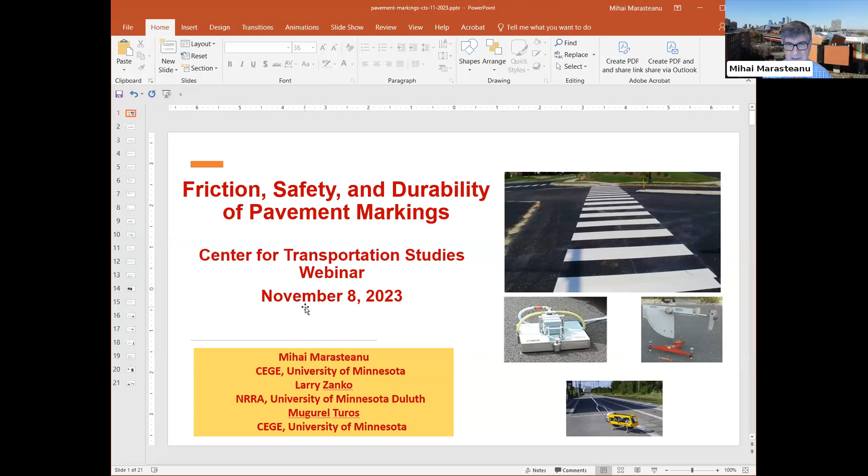I would like to start by acknowledging the research team. I am the PI and had the pleasure to work with Larry Zanko from NRRA Duluth. Actually, he just retired. And our research scientist, Mugurel Turos, on this project.

As Beth mentioned, the frictional characteristic of pavement surfaces is a major safety component, and pavement markings are necessary because they play an important role in traffic flow and safety, not related to skid resistance. However, due to the requirement of improved retroreflectivity for night visibility, they tend to be slippery because of the glass beads they generally contain.

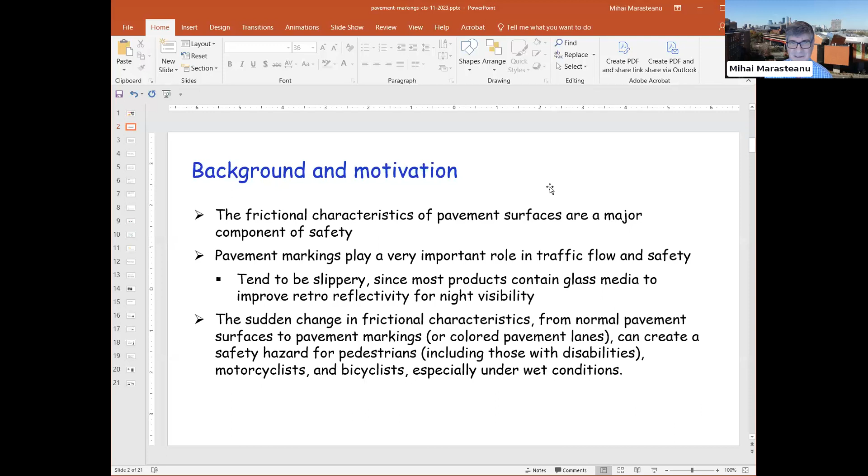And of course, the sudden change from a normal pavement surface to pavement markings without warning, which can also happen with colored pavement lanes, can create a safety hazard for pedestrians, bicyclists, and particularly motorcyclists, especially under wet conditions. I think we all agree with this statement. This research was championed by Ethan and his colleague Sonia. We started it a few years ago and are still working on it.

The main goal is to understand what's happening to address the gap in the transition from a normal pavement surface to a special surface condition, and also provide some solutions. As we always do, we look at what other people did, learn from it, avoid repeating prior work, and generate new ideas from the literature review. We performed an extensive review, both national and international, and I'll talk more about the international component later, since it provides useful information for implementation at the end of the project.

We also tried to find available data generated by others, and conducted a local survey to understand people's perceptions on this issue.

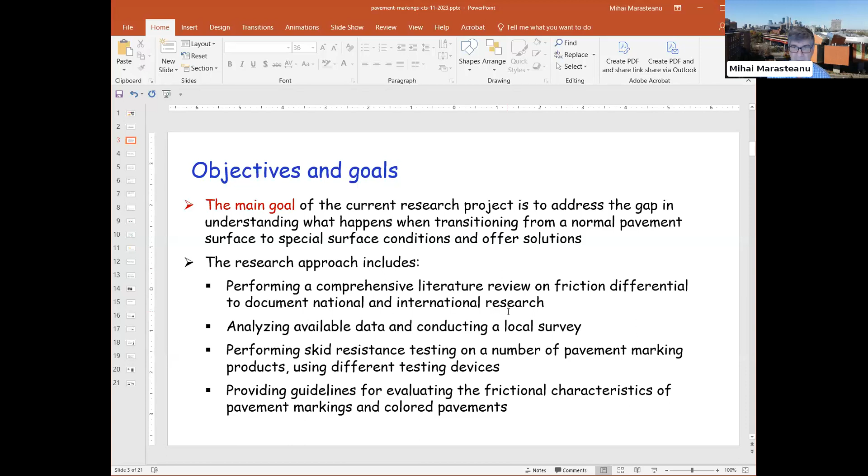Part of the research plan was to perform skid-resistance testing on a number of pavement marking products, traditional ones and some with improved skid resistance performance, using different testing devices. This is still in progress, and Ethan will discuss more about it; I'll just introduce it briefly. Our hope, based on all the results and findings, is to provide guidelines that could be used on a regular basis to evaluate frictional characteristics of these unique pavement surfaces, pavement markings, or colored pavements.

We performed a literature review and found a number of good resources. I don't have time to discuss all of them, but I'd like to highlight one particular reference from more than 40 years ago, from my own university, Penn State. The authors are J.J. Henry, Dave Anderson, and Gordon Hayhoe.

I had the pleasure of working with Professor J.J. Henry as part of their skid resistance surface characteristics group, and Professor Dave Anderson was my PhD advisor. He's also responsible for the PG specification for asphalt binders as part of SuperPave. But that's not why I selected them—this is a heck of a study, with a lot of experimental work in both laboratory and field conditions, and many valuable findings.

Of course, the materials used 40 years ago differ from what we use today, so we couldn't rely too heavily on the material characteristics, but the conclusions are still very valid. To give you an idea of the study, they tested 39 formulations of 11 different types of marking materials, in both laboratory and field conditions.

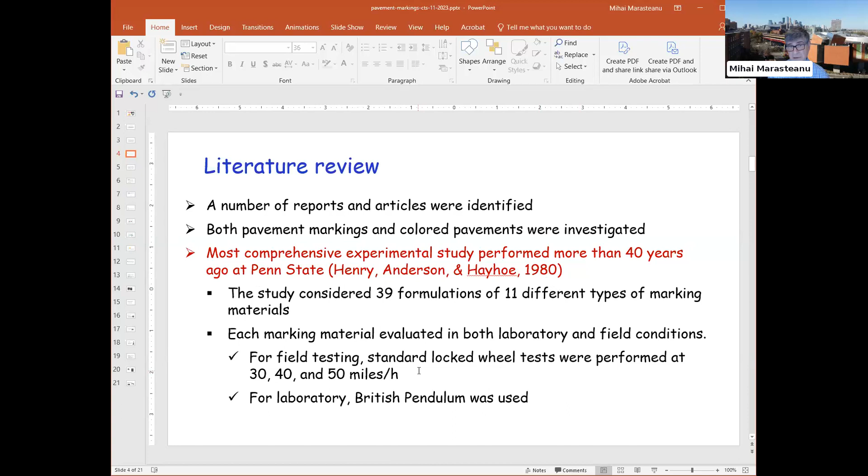At that time they used the standard locked wheel test, which was actually developed at Penn State, and in the lab they used a number of devices including the British pendulum test, which we also use. What they found, and which I think is still valid for current materials, is that none of the pavement marking materials approached the friction of the unmarked control surface, even after 9 months of exposure—so they remained with low skid resistance for an extended period.

Some markings were so low in skid resistance that the authors thought, if applied over large areas, they would clearly be a safety hazard. They also tried to establish allowable levels of marking material skid resistance, one likely goal of research in this area. However, they couldn't do so because they lacked enough experimental data, and because this involves analyzing the complex and variable nature of human behavior. So even with all these materials tested, they couldn't recommend a specific number, and suggested further studies were needed on driver behavior and accident data from marked roads.

They also concluded something most of us would likely agree with: that motorcyclists are more affected by this friction differential than drivers of four-wheel vehicles.

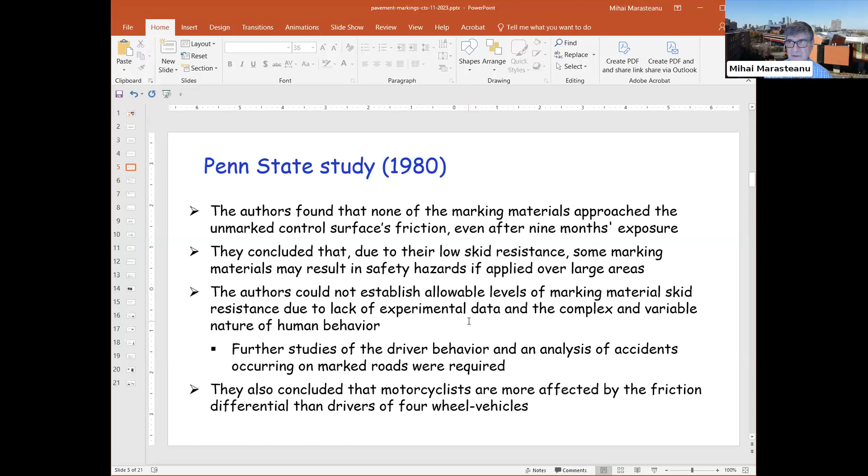And some of their conclusions and findings are reflected also in what we see later on in more recent research. What I have to say is interesting, but we still have this issue: we don't have a lot of data relating accident occurrence with pavement marking. So the data is very limited, as you will find out.

So we tried to do that after 40 years from this project, and the only historical crash data we found was from the Federal Highway Administration. However, this database has just a limited number of records, very few involving accidents, and it was mostly related to motorcycles. We did an analysis, downloading the data from FHWA and doing some statistical analysis, but because of limitations of the data, we couldn't find significant factors to clearly show what is influencing, in this case, the number of fatalities.

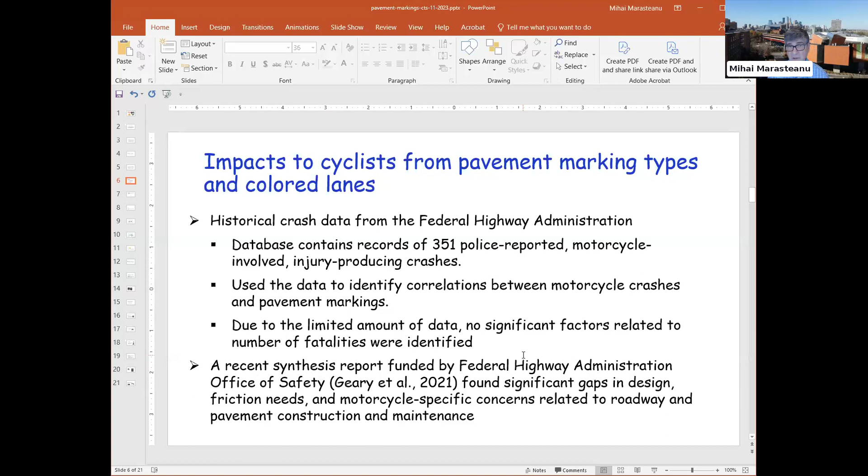We also looked at a more recent synthesis report, also done by the Federal Highway Administration, the Office of Safety. I communicated with Georgene Geary a few years ago, and they also found significant gaps in the design, friction needs, and motorcycle-specific concerns. In this report, they also provided a few recommendations.

Among them, one that we also followed without knowing about their report was using a dynamic friction tester and British pendulum tester for systematic testing of frictional characteristics, because they're easy to use. The locked wheel test device, obviously, requires very large strips of pavement markings and traffic control and so on.

They also suggested this innovative detail for pavement markings for crosswalks, designed to avoid the wheel path. As you can see here, here's the wheel path, and this is the crosswalk pavement markings. They show this as an example.

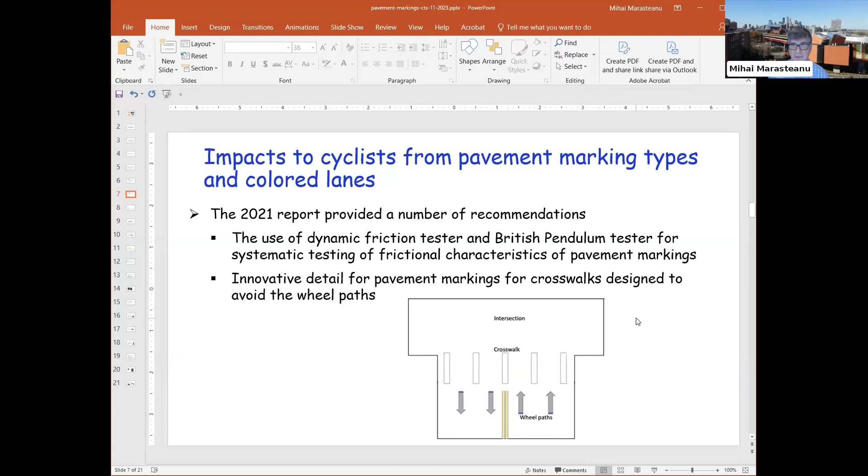All right, so next, what we've done was let's find out what users—bicyclists, pedestrians, motorcyclists—actually think about this problem. And we performed a survey. It was focused more on the local community, but we were also able to get information from bicyclist and motorcyclist groups and various transportation and engineering organizations.

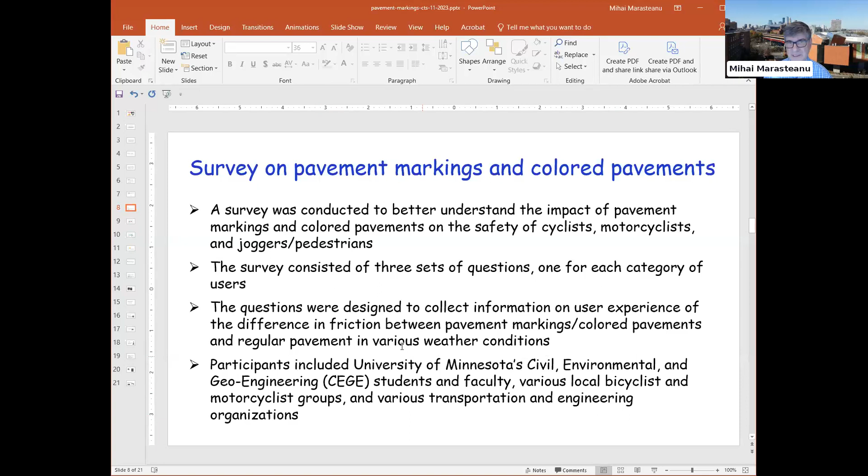We surveyed our department, our students, our faculty, our staff. I have to tell you that we have many of our staff, faculty, and a lot of students doing a lot of biking. I was quite surprised to see how active we were. Basically, we had three separate surveys, with different sets of questions for pedestrians, cyclists, and motorcyclists. I'm going to show you briefly some of the results here. We have it published as a task report in a lot more detail, but this is just a snapshot of what we found out from the survey.

So this is for biking. When biking on a surface with pavement markings, did you notice any changes in friction when transitioning from bare surface to pavement markings? The blue color is yes, even in dry pavement conditions. The orange one is just in wet conditions. The yellow is just in wet, icy conditions, or no. And you see that there are a number of yes responses here.

If you add both dry and wet—here it's just in wet conditions—most of them are under normal ride, not a big difference under accelerate, but you see a big difference in braking when you are just in wet conditions. And there are very few responses related to colored lanes, which is why you see this bar chart here.

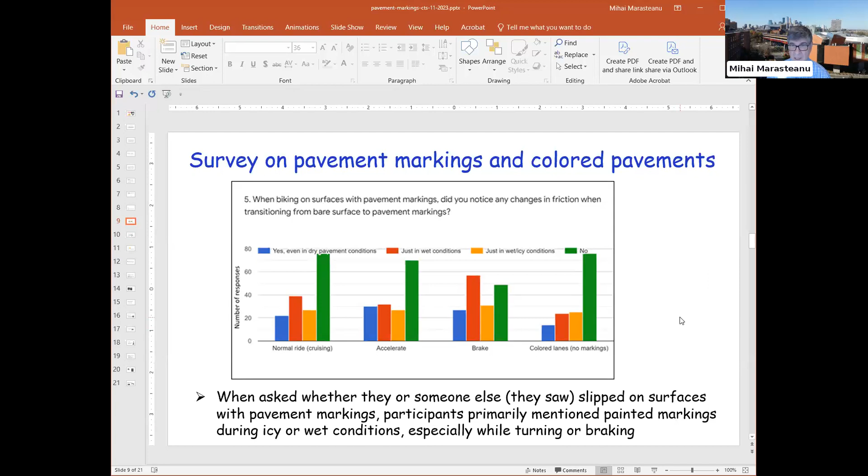When asked whether they or someone else slipped on surfaces with pavement markings, participants primarily mentioned painted markings during icy or wet conditions, especially while turning or braking. So that was something that many participants mentioned.

In terms of motorcycles, the same questions, and these are the answers. You see a lot more yes here, both in dry and in wet conditions. Most users mentioned that lane markings, markings at intersections, and crosswalk markings were the most prone to cause slipping, and again, smooth and painted markings were the ones responsible for most of these events.

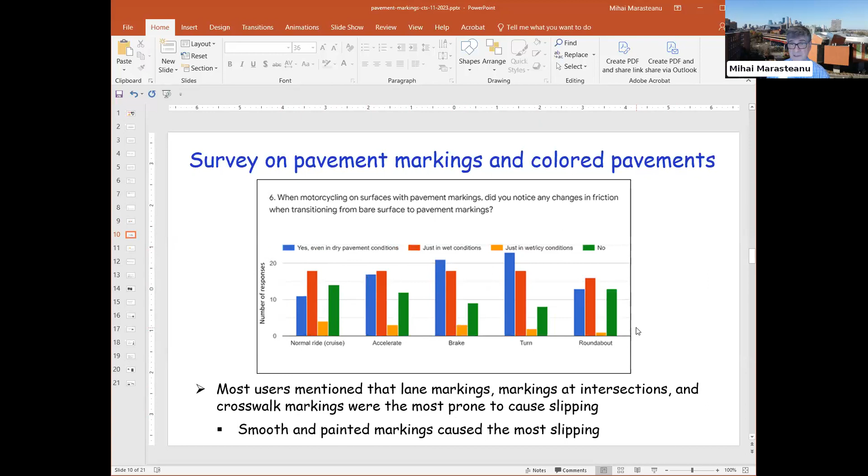In terms of joggers and people who walk, we have here a plot that shows on what kind of surface they walk or run. And you can see, of course, us Minnesotans, it doesn't matter—80% responded that on dry, wet, snow plowed, or ice covered, it doesn't matter, they keep doing it.

We also asked if they could comment on whether they, or someone else they saw, slipped on any pavement markings. Many users mentioned crosswalk markings—I am aware of a few cases among people I know—but they also mentioned that this happens on bare pavement surfaces while slippery in icy or wet conditions.

So in this case, they did not single out just the markings, it was the crosswalk. Maybe this is also due to the fact that people are rushing, trying to cross very quickly, and this is what happened. All right, so we found a number of interesting pieces of information about what's going on.

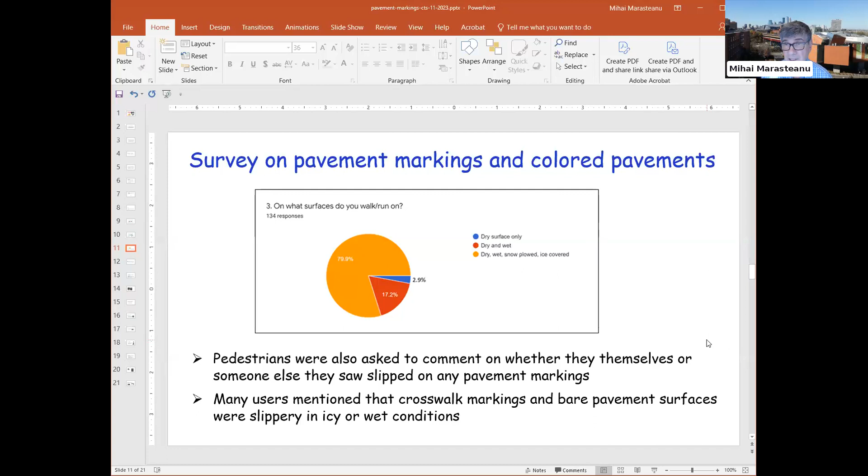While we were doing this and looking at what other people have done in terms of skid resistance of pavement markings, we found a very good resource later in the project, also through communications with colleagues from Scandinavian countries. I'm going to spend a little bit of time on this certification system used by Scandinavian countries, called NordicCert, because we found this to be the most comprehensive research and the most detailed process for certifying road marking materials. We thought we could get some very good ideas from what the Scandinavians are doing and hopefully apply some of that to our own certification system if we ever develop one.

This was developed for road marking materials and includes the countries of Denmark, Iceland, Norway, and Sweden. This started some time ago, more than 10 years ago. Based on conversations among researchers and engineers, they decided to establish test fields, and they all agreed on where to have these test fields. They established that in 2015, and they have new materials they've been testing every year since then, also measuring the properties. As of January 2023, the last information we got from them, they were able to test 560 materials from 25 manufacturers.

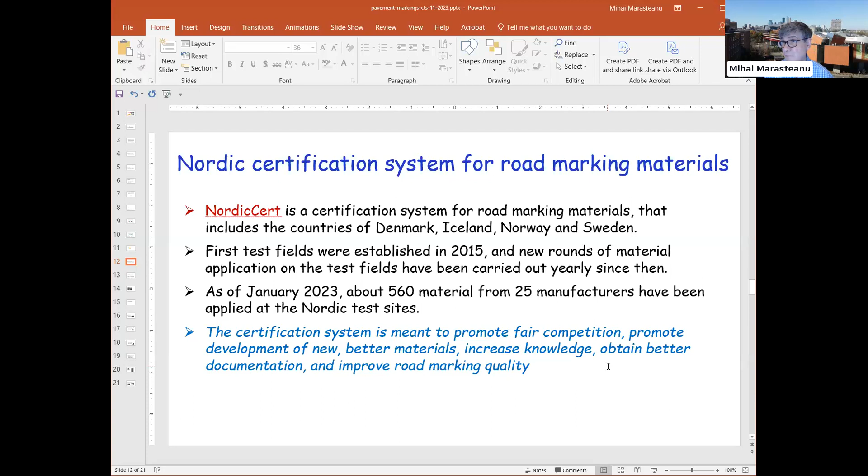So it's quite impressive. And I like this idea of this certification system. They developed it with the idea to promote fair competition, promote better development and new, better materials, increase knowledge, obtain better documentation, and improve road marking quality. This is not just for skid resistance—obviously they are looking at other properties also related to safety, retroreflectivity being one of the main ones.

So they proposed guidelines on materials for both longitudinal and transverse markings. Among the certification parameters, they included color, type 1 which they call flat, and type 2 which has properties that enhance retroreflection in wet conditions, inlaid markings, anti-skid materials, and so on. If you are interested, I encourage you to visit their website—there is a lot of very useful information, more than I can present here. But it's quite interesting to see how they started thinking about this a long time ago, and now they have a good system in place to look at these materials.

We also found a number of additional documents once we got to the NordicCert, published by the Swedish National Road and Transport Research Institute, the VTI, and the Danish Road Authority. Some of them, as I mentioned, we think can be used to develop something similar, maybe even better, for our conditions.

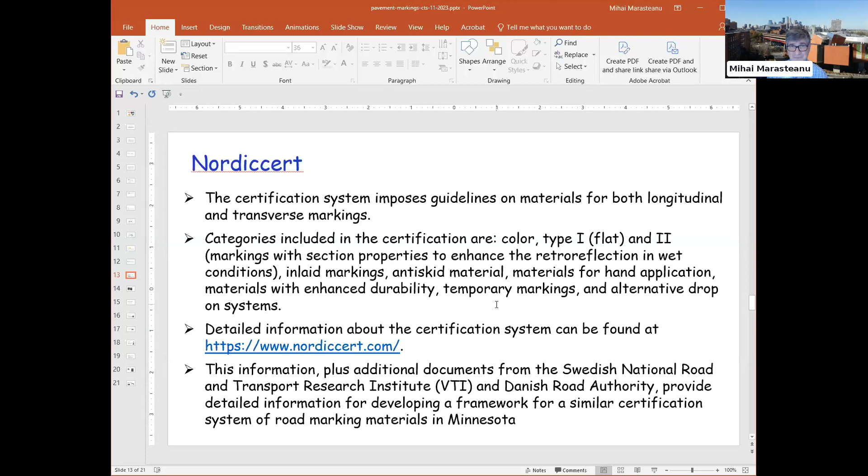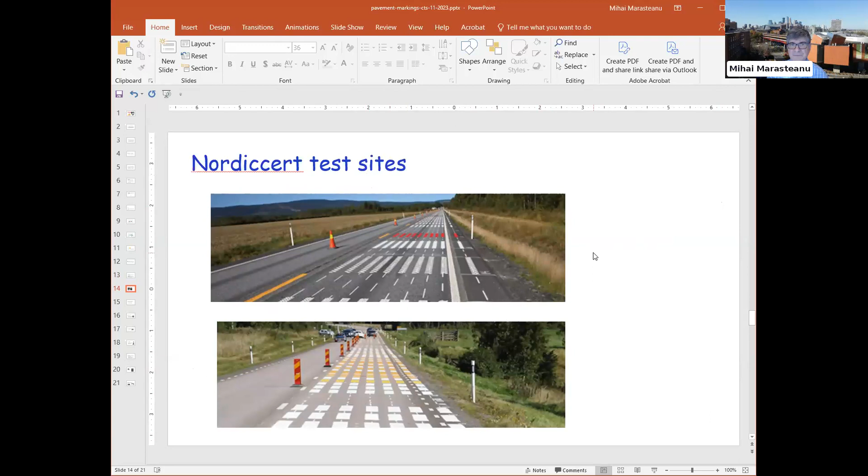These are pictures taken from their website that show the test sites. They are located in different countries here. So that's how they look—they look a little bit different than ours, as you can see.

Basically the way this works, they perform performance measurements. They apply the materials and carry out measurements two weeks after application, then keep monitoring them for durability after one year and after two years. All measurements are performed in the direction of traffic, and all measurements are done in dry weather and on dry markings, except friction, because friction is not too bad when it's dry but is really affected by the presence of water, so that's measured in wet conditions. There are a number of parameters measured, but mostly retroreflected luminance and luminance coefficient under diffuse illumination, and of course friction.

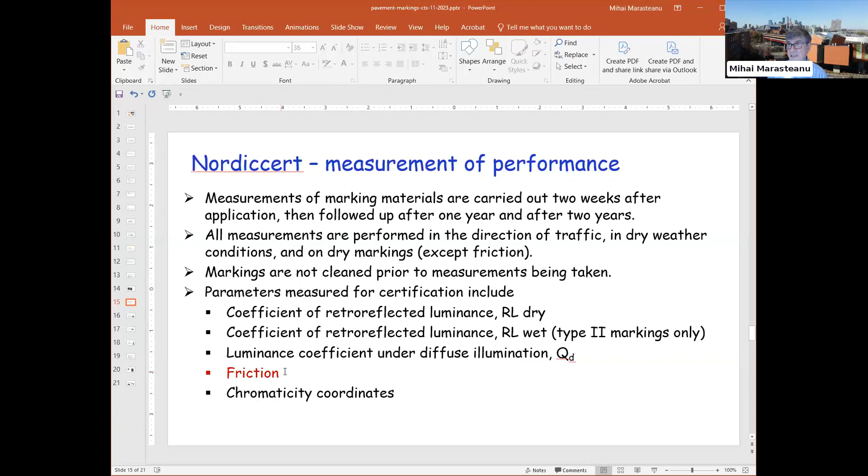When we did our literature review, we found a lot of research focused on retroreflectivity properties, but very little research done on friction of pavement markings. So this was one of the very few that incorporated this. They had a very clear way of measuring skid resistance—they measure it on wet markings like everybody else, but they developed their own portable friction tester, the PFT. This was developed by a Swedish company called Coralba, and it was the result of a lot of work performed at the Swedish National Road and Transport Research Institute over the years.

During that period of time, they found some very good correlations between the Coralba device and the British pendulum test that they used prior to the development of this particular testing device. We have been in contact with them and thought at some point to get such a device, but communication was not that great, and the device is quite expensive, so we did not include it in the budget of the project, but maybe later on we can revisit this issue.

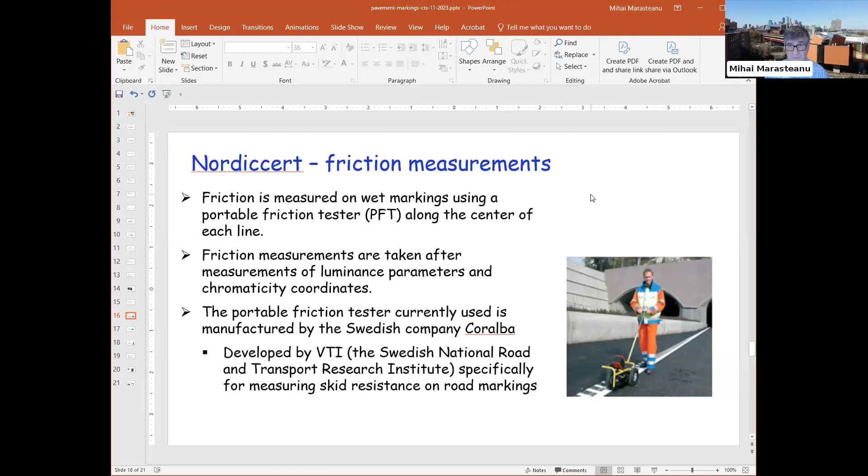We also found out there are a number of new developments that I thought would be worth including in the project, and maybe something that could be used in our situation. They developed a different type of road marking with a unique profile that combines the benefits and performance of flat and structured type markings. You can see it right here.

They have high wet night visibility because of this particular structure, but because they are flat at the surface, they provide low noise and vibrational levels. And because they are not flat at the pavement surface, they drain water from the pavement marking during rain. According to their ads for this product, the response time of motorists improved by up to 50%, so basically you improve your skid and braking ability quite a bit.

What I found also very interesting is this idea that in areas with very good nighttime lighting, such as downtown intersections, where you have ample lighting and it's not very dark, you don't really need these special retroreflective properties that actually diminish skid resistance. So maybe for these particular areas, pavement markings without retroreflection could provide a good solution, because they will also have good skid resistance.

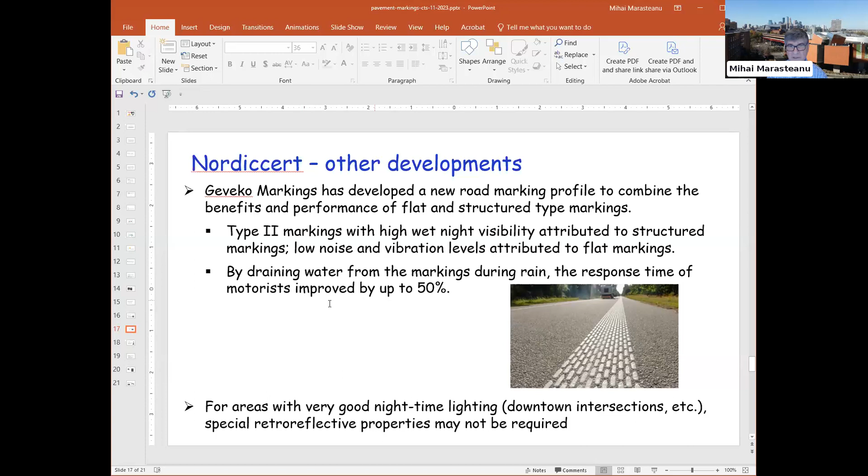So those were the things we found quite interesting and something to think about for future research. Once we finished getting all this information, we moved into the next phase of our project, the one where we hope to get the very meaningful information that will help us select the best products: performing friction testing on various pavement markings.

Our initial thought was to do testing with the British pendulum tester, maybe the most widely used, very portable. Of course, you just measure a tiny little bit of the surface of your pavement marking, but if you do this repeatedly, you can get good information. Since it's the way the rubber boot and the pavement surface interact, the speed is very low when you get this friction measurement, so it's more representative of skid resistance experienced by pedestrians and bicyclists.

Of course, our hopes were with a dynamic friction tester. This device has been proven to be excellent for determining friction properties. It was developed many years ago - I remember in the early 1990s meeting with the Japanese engineer who developed this product. He was trying to do some measurements at the Penn State research facility there. But now it's one of the most widely used devices, very simple, very portable, and can do measurements at different speeds, which is really important. So this was the other device we had in mind.

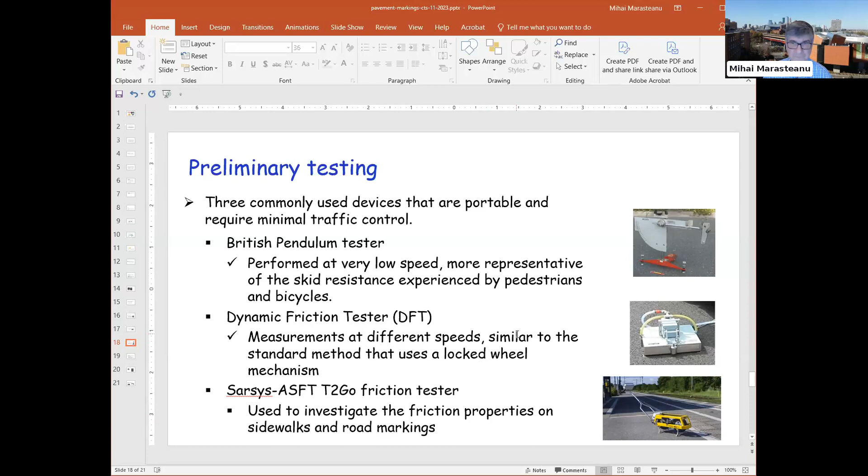We also thought of using the ASFT T2Go friction tester available at one of our laboratories at St. Anthony Falls. This was specifically designed for friction properties on sidewalks and road markings. We had big hopes for this device, but for various reasons, as I'll tell you, we were not able to use it.

So we did a lot of preliminary testing, some done on campus at the University of Minnesota, and we found very good correlation between the British pendulum and the DFT results. We found a very similar trend in testing performed for a different project near Duluth. My colleague Larry Zanko is the PI of that project, investigating the use of taconite aggregate as a lower cost alternative for high friction surface treatment to replace calcined bauxite, and we did a lot of friction testing there as well.

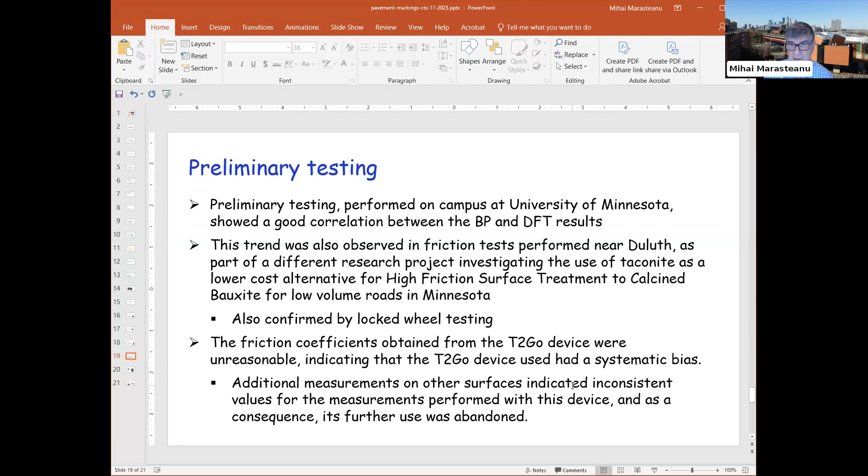We found that BP and DFT results correlated quite well, with additional confirmation from measurements done by locked wheel testing - they were able to do locked wheel testing measurements too. So we are very confident that British pendulum and DFT give reasonable, reliable results. We are not sure what happened with our T2Go device, but our results were not reasonable - very different than the other two devices - so we decided not to use it anymore. We ended up just using the British pendulum and DFT results.

These are some of the locations for our preliminary results, to make sure that the devices we are using give, as I said, reasonable results.

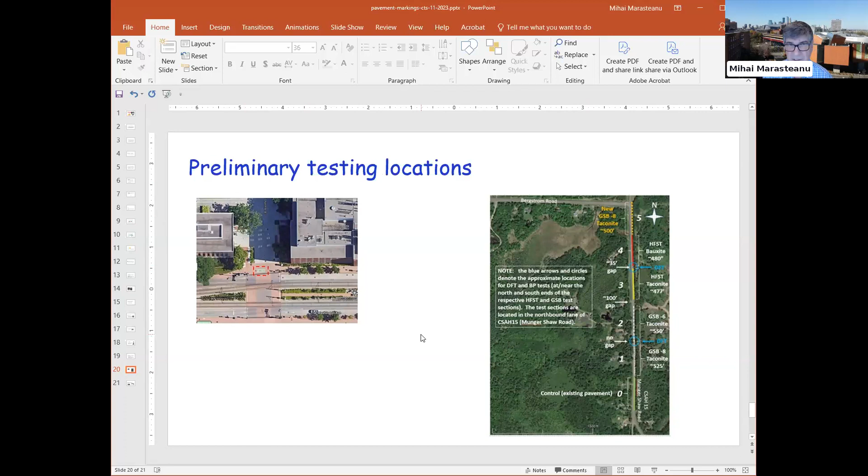So this is a location on campus. This is the location in Duluth, near Duluth, actually.

Based on everything we've done so far, we decided to move ahead with our testing campaign and perform friction testing on a number of pavement marking products. Since traffic control is such a big problem, we contacted our colleagues at the MnROAD facility to apply the pavement marking products there, test them, and keep monitoring them. This approach has significant advantages: minimal traffic control, different pavement surfaces available, and the possibility of long-term evaluation for skid resistance and durability, and possibly retroreflectivity measurements as well.

I'm showing you a picture here of the low volume road at MnROAD and some of their test sections, and we were able to do that. Ethan was instrumental, with tremendous help from our colleagues at MnROAD facility - Ben, Jacob, and Jeff were of great help. I'll stop here and let Ethan, who was responsible for all this work done at MnROAD, tell you about what was done there. So thank you.

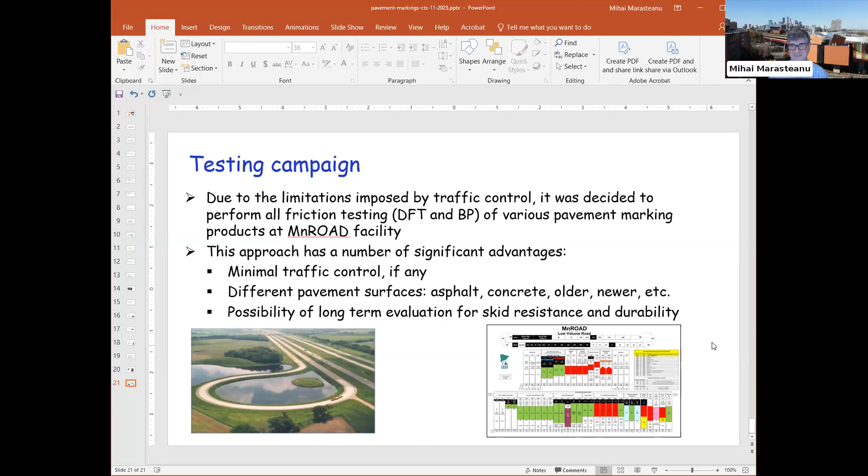Thanks a lot, Mihai. I'll take over here. Okay, I think we're up and running. Somebody wants to - it looks like Mihai's nodding. I'll take that as it's good to go. It is. Okay, perfect. Thanks, Mihai.

I'm Ethan Peterson, pavement marking and crashworthy engineer here at MnDOT Office of Traffic Engineering. I'm going to go over the background, why this came to be, and then go over a lot of the material installations as we mimic what we've been using and what we're looking at using in the future - some stuff we've demoed, different techniques. We were lucky enough to get a contractor on board to install a number of things, with a couple different manufacturers, and get out on MnROAD's low volume road here. We'll jump right in.

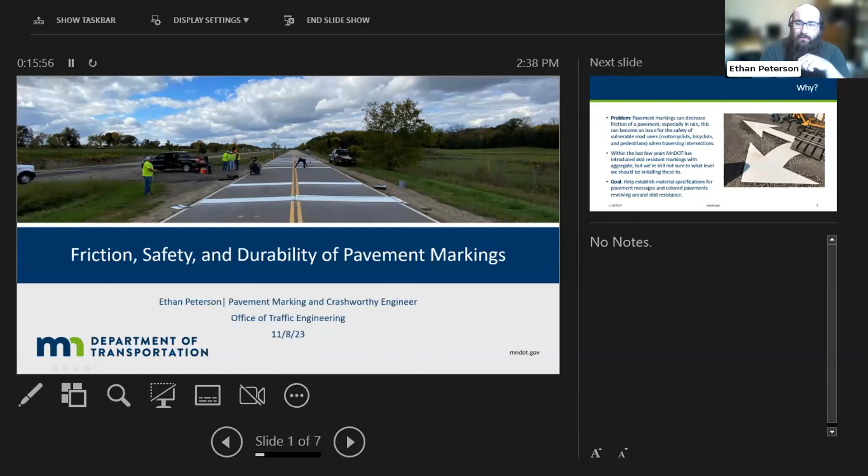So why, right? Why is always kind of where we start. Mihai went over this already, but I'll briefly run through it as well. The problem really is that pavement markings can decrease friction of a pavement, especially in rain.

I think we've all seen this. We've all been pedestrians, for sure. We've all probably biked through this stuff, and it really becomes a safety issue for what we're calling vulnerable road users - motorcyclists, bicyclists, and pedestrians - when they're traversing these intersections with pavement markings or colored pavements.

Some background: within the last few years, MnDOT has introduced some skid resistant markings, mainly with an aggregate. A lot of it has been a preformed thermoplastic product for the most part. We'll go over the materials - we have a flow chart next - but the goal of this really is to help establish our material specifications for pavement messages and colored pavements revolving around skid resistance.

We really would love for these pavement markings and colored pavements to match the friction of the pavement they're on. I don't know how many are familiar, but apparently F1 racetracks put a lot of effort into making all those pavement markings match the surface for all the same reasons we're looking to.

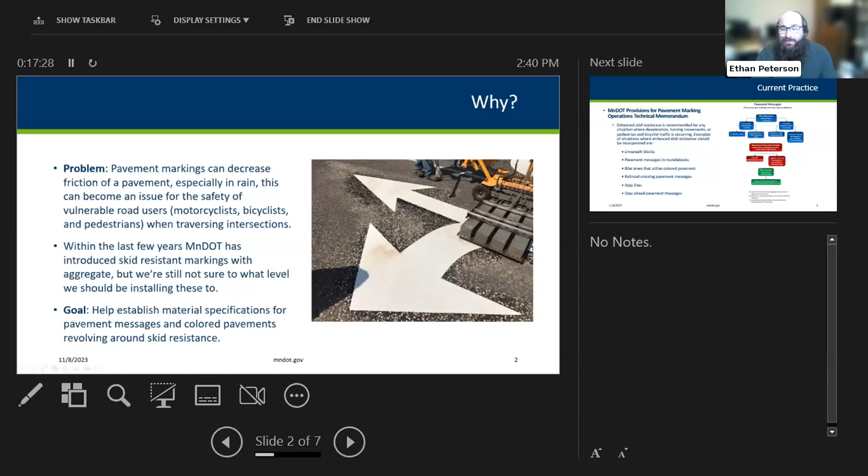The current practice for MnDOT has been established through our provisions for pavement marking operations technical memorandum. I'll highlight the section that talks about skid resistance - this isn't exactly it, but it's a section of it. Enhanced skid resistance is recommended for any situation where deceleration, turning movements, or pedestrian and bicyclist traffic is occurring.

Examples of this would be crosswalk blocks, pavement messages, and roundabouts - roundabouts being a big one - bike lanes that utilize colored pavements, railroad crossings, stop lines, and stop ahead pavement messages. So that's where we're really pushing for getting these skid resistant pavement markings out there. I'll admit we're kind of in our infancy of this.

This project's going to be a great starting point. We're already calling something out, but we don't know what our specification should be. We have a number, and we really want to see if that's going to meet our needs. Here you can see the flow chart that's in that tech memo for pavement messages.

You look at bituminous, you can kind of just follow along. We've got an expected longevity for each of these markings, and then we just call out each of these pavement markings. I won't go through them all, but feel free to Google this, and you'll find it pretty quickly.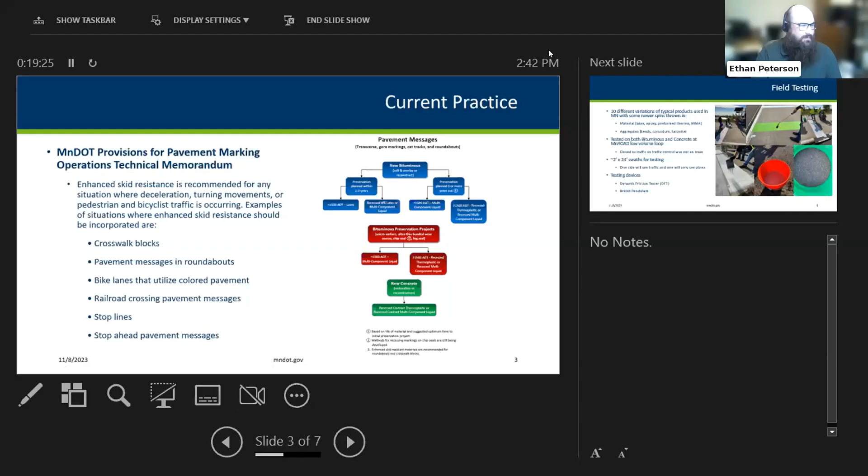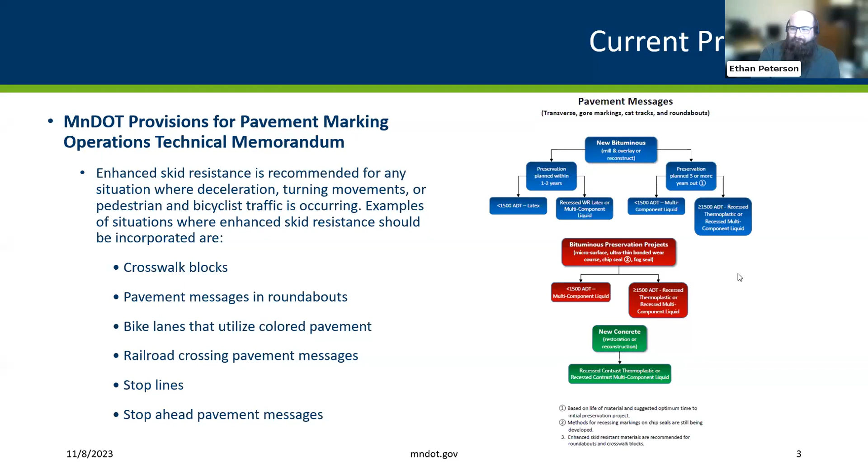Ethan, there was a comment that you are not in presentation mode. Could you switch, because we see both your next slide? Oh, I must be... I know your Zoom is not. I apologize about that, I might have shared the wrong screen. That's my bad. Tell me if this is correct now. Yeah, I've got Ethan. What's that? That looks good. Yeah, there. Okay, I thought I had it. Apologize for you guys seeing not as clean of a presentation here. We'll pick up here, and I apologize if you hear my dog, somebody just showed up at my house, I think. A delivery, I'm sure. Perfect timing.

Anyways, let's jump to the field testing here. We looked at 10 different variations of mainly typical products, but also some things with newer spins on them. The things we altered were the materials. Typical stuff you see in Minnesota are latex, epoxy, preformed thermo, and we've started demoing a lot of MMA, or methyl methacrylate - it is not mixed martial arts, that would be interesting to apply to pavement. We also looked at the aggregates you can switch in. What we messed with were the beads - we looked at corundum and taconite.

As said before, these were tested on the low volume loop on MnROAD, and they were installed on both bituminous and concrete. Like Mihai said before, it was awesome to use MnROAD because there was no traffic control necessary - there's one truck that makes a round all day, and all we had to do was call him off, and there wasn't any traffic, so that was great. As you can see in the pictures, what we were putting down was a 2-foot by 24-foot swath. We avoided the center line and edge line markings as much as we could, just to preserve those. This low volume loop is actually going to see traffic only on one side, and the other side will see just plows. So as stated before, the testing devices are going to be the DFT and the British pendulum.

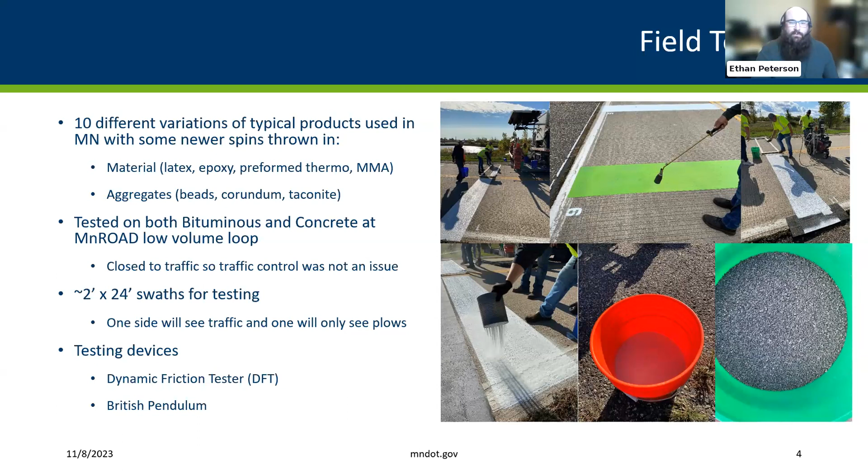So kind of some of the nitty gritty here - there's all 10 items here, and I can rattle these off really quick. The first thing we looked at was a latex with an AASHTO M247 type 1 latex, type 1 bead. Second one is the epoxy with the type 1 bead - those are pretty typical installations when not looking at skid resistance, and we wanted to make sure we get those in as a type of control. The third one is an epoxy with the type 1 bead and a corundum. We actually did some layering in some of these, and that one was layered - one layer with that skid resistant corundum, then on top a mix of beads and corundum. Number 4 is an epoxy with beads and taconite, same kind of layering approach.

That fifth one is an epoxy with a crushed glass product. From my understanding, it's a recycled glass that gets crushed to not exactly a super pointy characteristic, but it definitely is skid resistant - it has a pretty aggressive feel to it, some of these do. The sixth one is a bike lane type preformed thermoplastic, and that doesn't have any enhanced skid resistant items in there, just beads. And number 7 is preformed thermo with enhanced skid resistance, so that has beads and then also some, I believe, corundum in that one.

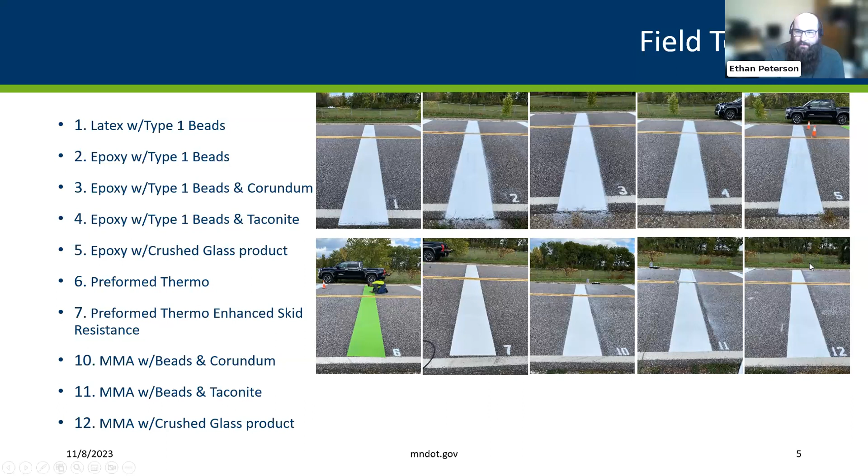Just for fun, it's always exciting to see things get installed. These don't have any volume—there was quite a bit of wind that day, and the machines are pretty loud, but I'll run through some of these installations.

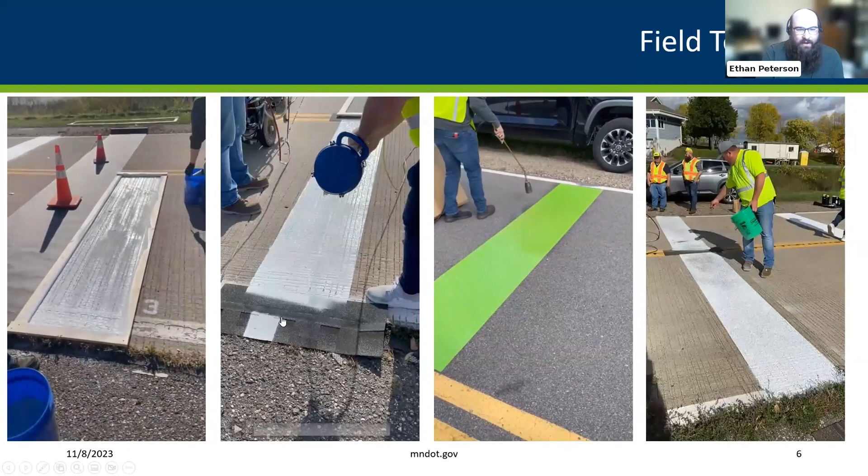Number 3 here is an epoxy with type 1 beads and corundum. What you're seeing get put down, sifted on, is the corundum through that little bucket. You'll see there are different methods to adding aggregates in this one.

The second one here is actually MMA, with beads and corundum. Right here you're seeing the corundum get spread through a pneumatic sprayer. This was pretty neat—it puts out a really even distribution compared to hand casting or the sifting technique.

Although the sifting technique, for how rudimentary it is, does pretty well.

This third one is a preformed thermoplastic. You can see I'm torching it on, and it's always kind of neat to see—this is the portion that hasn't been heated yet, and this one is heated.

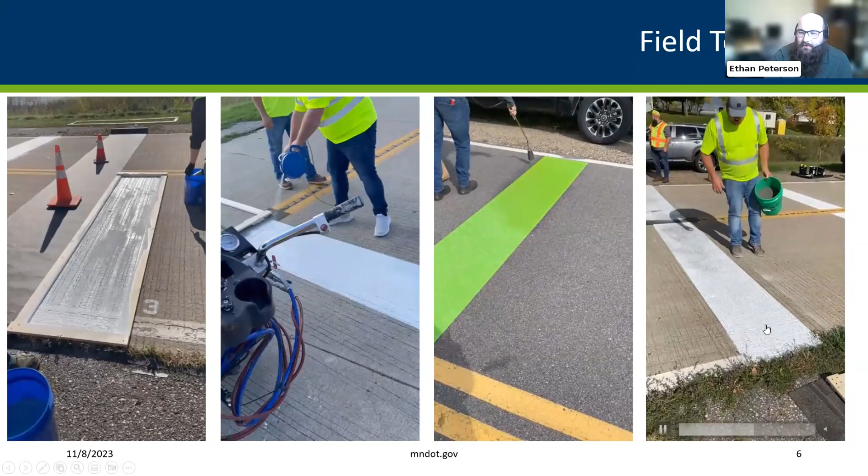This last one is actually sample number 11, an MMA with taconite. They hand casted that on, and that aggregate was a little bigger. I think we would try a smaller gradation next time, although it is definitely going to give us some good skid resistant characteristics.

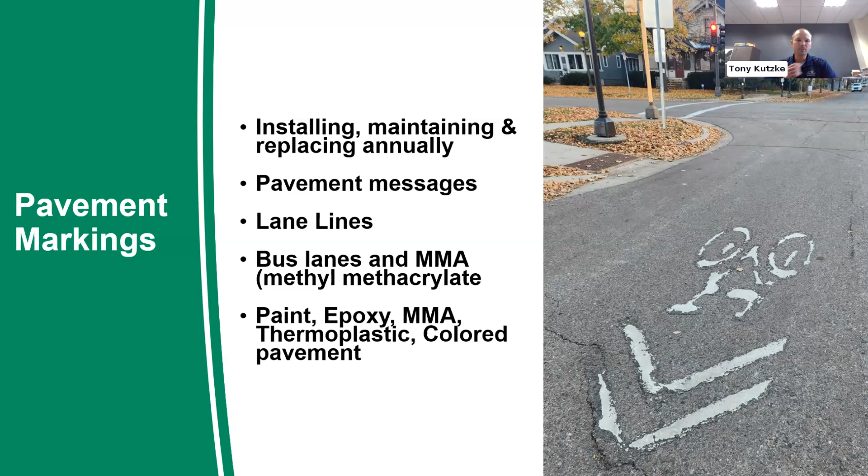One thing that we've heard from residents at times is that these pavement markings we put down do result in concerns for safety for skid resistance.

Now, we've often looked at durability, because some of our resident concerns are when these pavement markings start to wear, their impact, visibility, and effectiveness tends to also go away with the pavement markings disappearing. But also this skid resistance is something that's been a concern of residents within the city.

We also have advocacy groups who are looking for ways to increase safety in the roadways, and oftentimes pavement markings are one way to do that. We want to ensure that when we add pavement markings, they don't result in additional concerns from users related to now we have great visibility of pavement markings, but now we have a slip resistance issue.

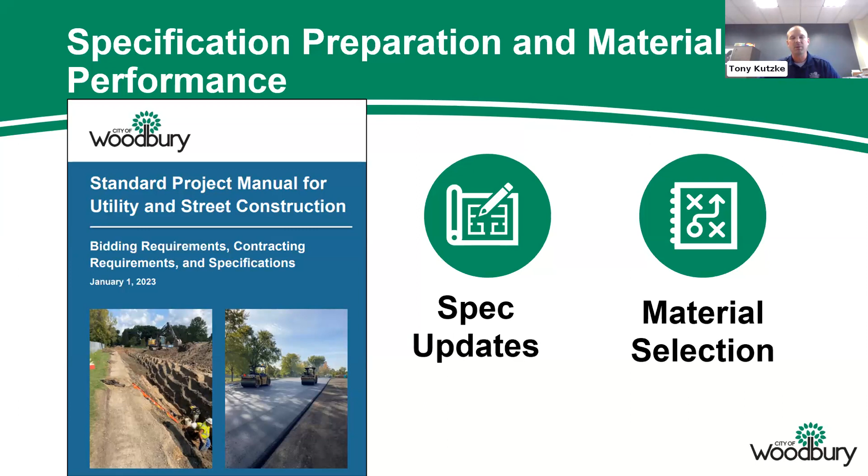Material selection is extremely important. There are, as mentioned earlier, a lot of materials available, and the specifications, if we put a focus on skid resistance performance criteria, may help us with material selections. Research often sparks additional research, and we like to keep an eye out on developing standards, which help guide future research and also guide shifts in our industry to focus more on skid resistance, as we have with durability in the past. We like to consult the industry, understand the development of new products, and use that information to inform future decisions as we look at our specifications.

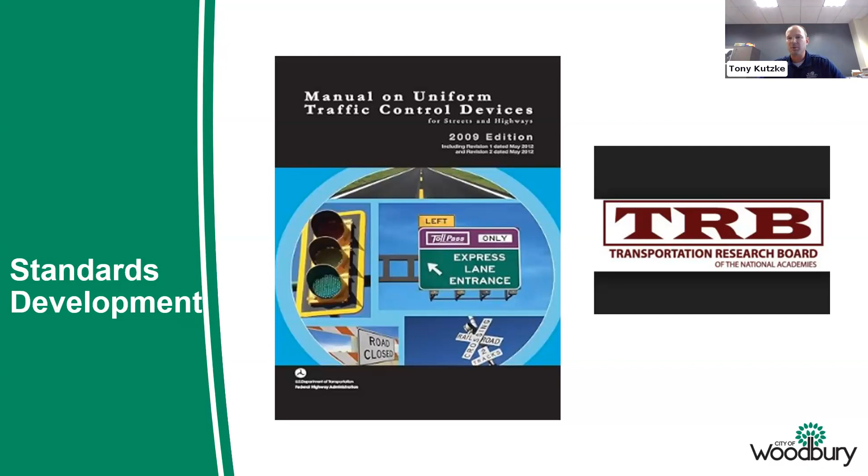Research and new data also helps guide policy document preparation. The City of Woodbury just recently developed a bicycle and pedestrian plan, focused on commuting and recreational use of bicycles within our transportation networks. From that, it had a large focus on how to provide engineering design, education, and enforcement for users who are either walking or biking in our networks, with additional information and data related to skid resistance from the research. We can certainly also add components to the plan for skid resistance on pavement markings, so that the application of those don't result in unintended consequences with slip hazards.

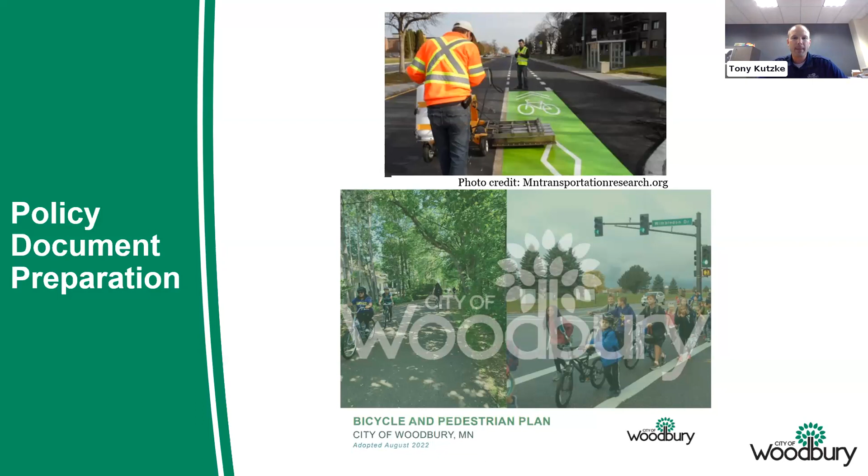The City of Woodbury is also under construction right now on a number of roads with a new bus rapid transit project. The Metro Gold Line is about halfway done with construction. Through the application of dedicated bus lanes on the project, we anticipate seeing some installation of MMA pavement markings to identify those bus lanes. Those result in very large square footages of pavement area with pavement markings, and those are high demand areas for biking and walking to those transit stations. So we want to ensure that the products we use and the application of those products result in safe surfaces that will not result in slip hazards.

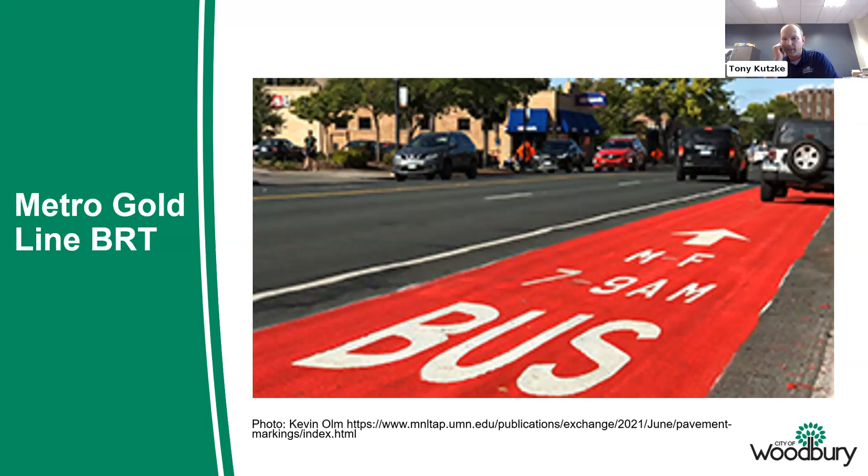Bob Job asked, has chip seal work both pre and post pavement markings been considered? Any of our panelists have thoughts on that? Or Tony, have you seen that maybe in application? There's no doubt that chip seals increase the skid resistance of the pavement, and application of pavement markings on top of them can still maintain those. It depends on the products that you have. So that's something that could be looked at further.

Good question. Jonette Kunau asks, we have some projects with significant amounts of MMA. Does Ethan have any preliminary recommendations for the type of aggregate?

Sure. I think we've been doing this, and actually we haven't been calling it out specifically, although we've taken into account a Mohs hardness spec—something like 7 or greater for an aggregate. That would be something like taconite or corundum, and those are the two aggregates we've seen in MMA.